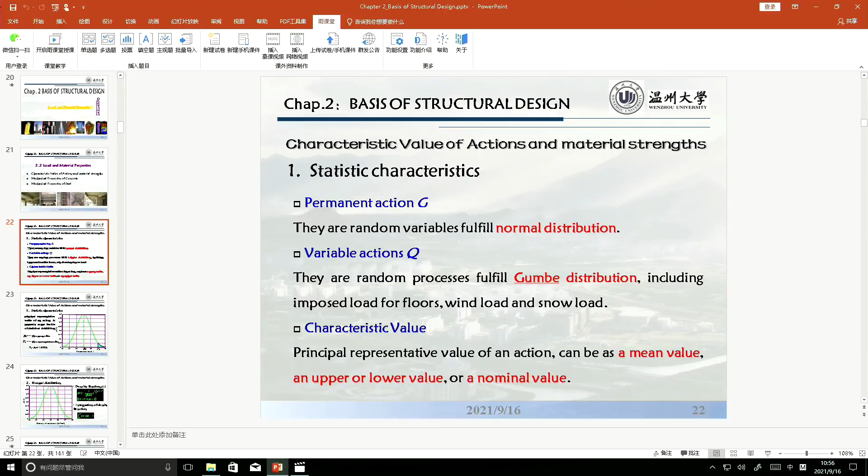And the permanent action, here, fulfills a different distribution. One is the normal distribution. Normal distribution is also named the Gaussian distribution. If you learn another class named statistics, you will systematically learn these things. Here, in my class, I just want you to know they fulfill the normal distribution.

For the normal distribution, they have some features. They are symmetric, right? Yes, symmetry. And for this distribution, they do not have symmetry. Okay, let's see this feature. This is the normal distribution figure. The shape will look like this, okay?

The density function can use this formula to describe this function. We use this function to draw the line. And how do we know the permanent load fulfills this normal distribution, actually? Because it comes from statistic analysis, right? Because people do lots of these samples, okay?

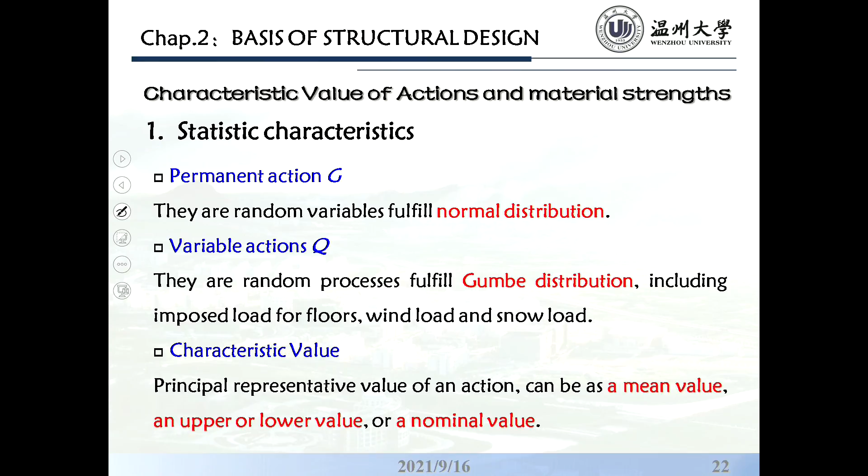Yeah, the representative value, the sigma. Because we want a value they can contain, right? The almost of the things, because here we mentioned the probability. Why we choose at here as the value, because at here these values they can contain 95% of the whole value what we measured.

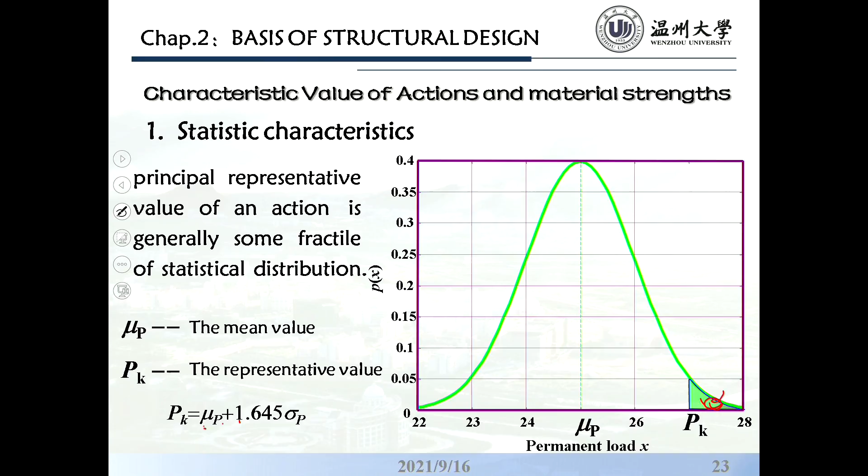Yeah, this is the normal distribution. Look at this picture I get from the code. In the future when you do the structure design, you need to read the code, and you will find the table, the code gives you tables about the different materials. Look at here, the density he lists in here. He does not give you the actual value of the density, they just give you a range.

So how to choose the value in your design process? We need to know, because the range means, since we construct, if we use this method, it's affected by the temperature, climate, and people's construction method. These things all will affect. So here he just gives you a suggested range of values that you use to do the calculation, do the hand calculation.

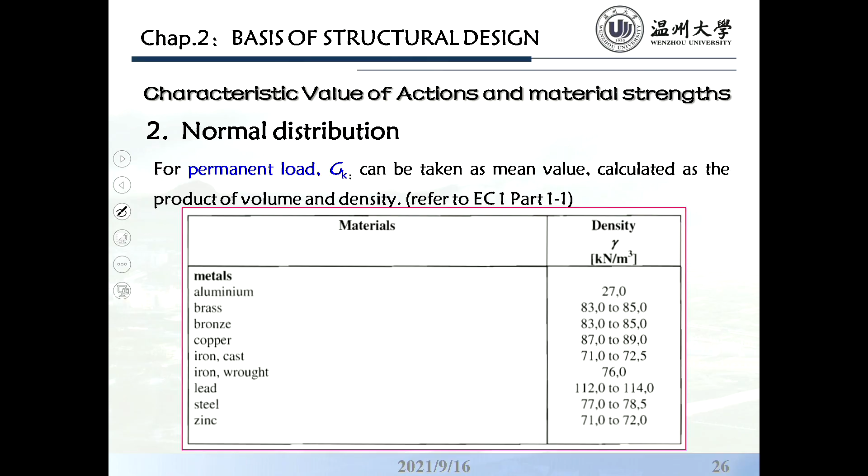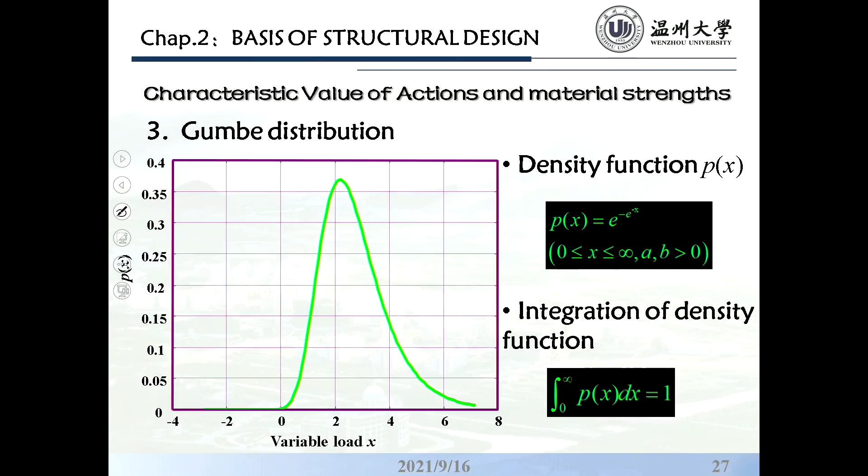For materials: aluminum, bronze, copper, iron, steel. They just give you the range because a lot of things will finally affect these values for density. This is the Gumbel distribution. They also have a different formula, but the meaning is the same, like the normal distribution.

Look at here for the imposed load. We need to classify different categories A, B, C, D. That means later we'll choose a different value. But look at here, for the load we choose from the code, they just give you the range. They do not give you the actual value. You need, according to the actual situation, to choose a value in this range in your design process.

This range, I explain why the values listed in the code, they just give a range, not the actual value, because the values of the load fulfill a distribution. They have discrete, occasional occurrence, they are not a concrete value.

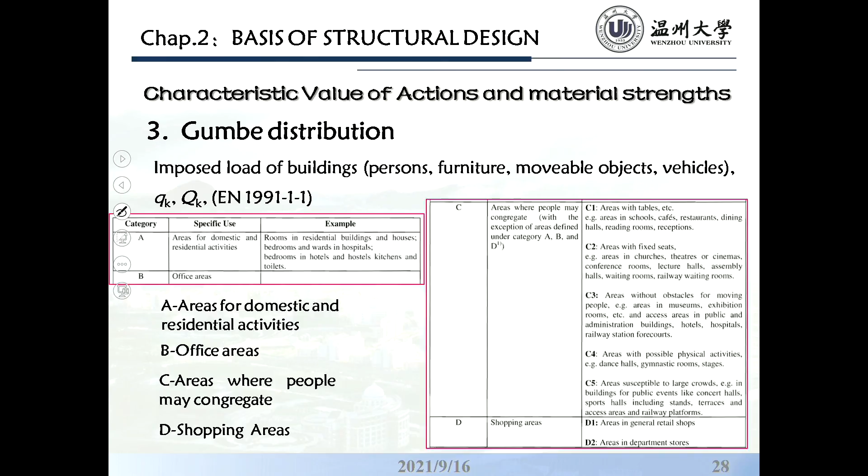This is for imposed load, the Gumbel distribution, the same like the density of the material. Here we know some statistic analysis about the permanent load. They fulfill the normal distribution, and for variable action, or just imposed action, they fulfill the Gumbel distribution.

And I just captured some table from the code. As you know, in the code, the load value chosen, they just give a range, do not give you the concrete value, right? Just the same word like concrete, 具体的, do you find that?

Well, I can see what you're writing there. The handwriting is 具体的. Wait, not handwriting, the character. 体, oh, from shenti, 身体. But here in 具体, I know the word, the English word is the same as concrete, but they have a different meaning. 具体的 is a describable word, like a concrete value or specific value. Yeah, but it's specific, the same meaning as specific.

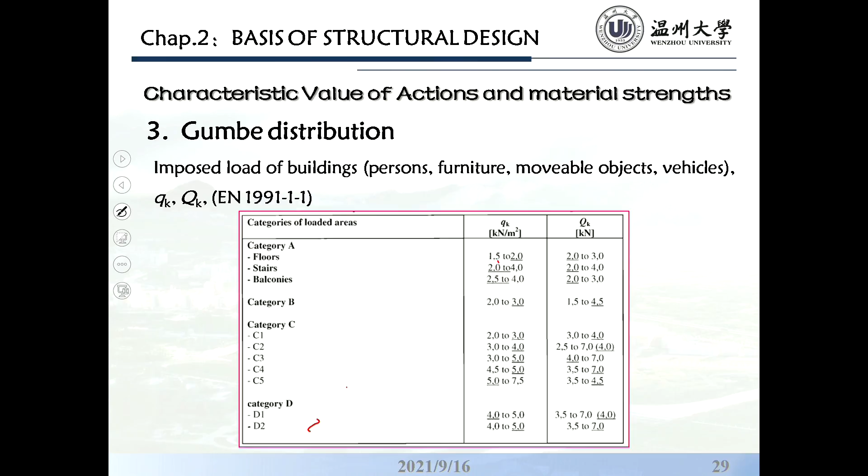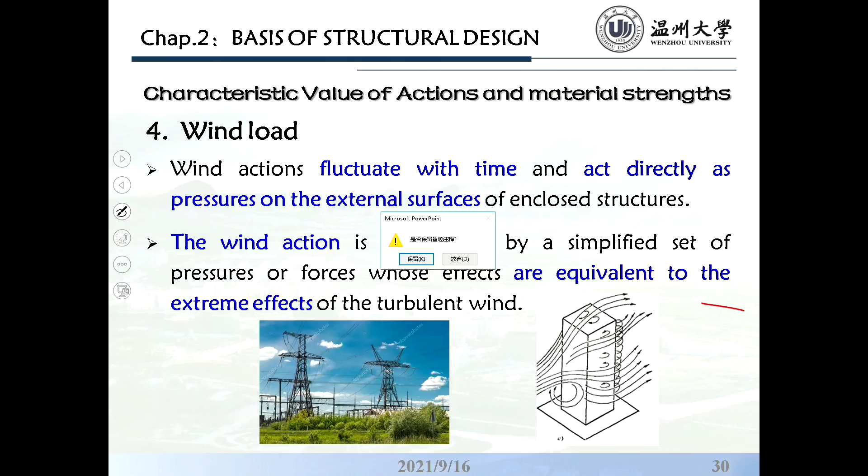Okay, here I look at this. It will relate to the tall buildings that we talked about in chapter 1, how tall a building can be.

Wind is one of the most important factors that architects and engineers must consider when designing tall buildings.

While skyscrapers might appear to be static, how does the engineer deal with the wind load? How do they use some method, some solution, during high building design? They use methods to strengthen the structures, to reduce the wind effect.

Tall buildings are in fact designed with a degree of flexibility in mind. This is principally due to the impact that wind forces, known as wind loads, have on a building as it becomes taller.

Here I introduce a character of wind load: wind load near the ground, the value is small.

With increased altitude, at the top, in the high, the wind speed will be larger. That means the wind load has this pattern.

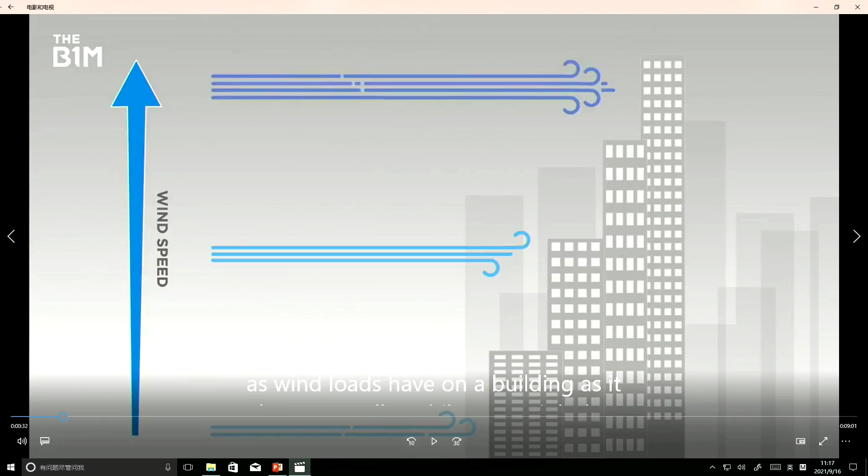Right? The load, because in the future, in the next class, you will know the wind load is related to the wind velocity. If the wind velocity is high, it means high wind load. So according to this video now, we know the wind speed is higher at height.

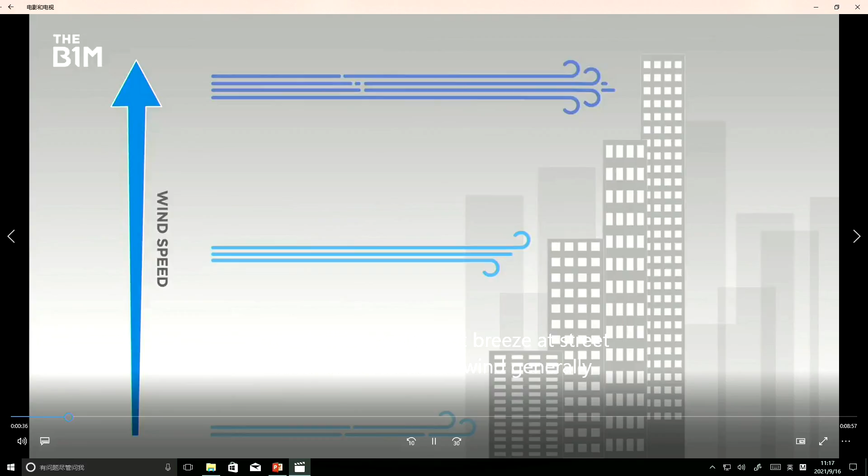Might be experiencing a pleasant breeze at street level, but the force of the wind generally grows much stronger the higher up you travel. While the steel and concrete used in a skyscraper's superstructure is designed to bend and flex to absorb the impact that these wind loads have, the degree to which a structure is able to move can have a significant impact on the comfort of those inside the building.

When buildings first began to grow tall in the 1890s and 1900s, height limits were imposed, such as those introduced in Chicago, to prevent their masses from blocking sunlight. In New York City, ordinances were passed that allowed tall buildings to develop on the basis that they were set back after reaching a certain height. This allowed sunlight to reach street level, whilst breaking up the facade and reducing the impact that high winds had on these early towers. By the 1960s, however, larger box-like skyscrapers began to come to prevalence, bringing with them a whole host of wind-load engineering challenges. The first problem that began...

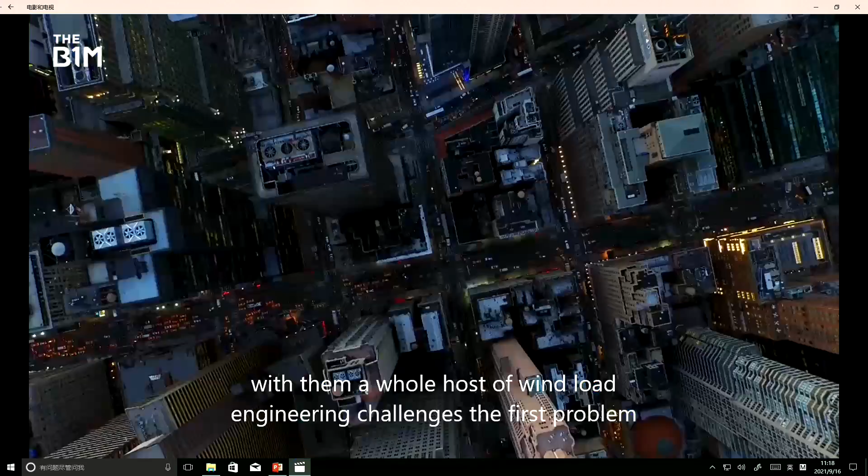Here, I think you realize why people build high buildings, because in New York, they built a lot of skyscrapers to prevent blocking sunlight. So one building blocks sunlight, so another building is built higher for sunlight. So the height of the building becomes higher. That caused the high buildings, the skyscrapers, to come about. So this is the background of why high buildings occur in our life, because it's just for sunlight, like a plant. If the plant is higher, it can get the full sunlight. So that's the background.

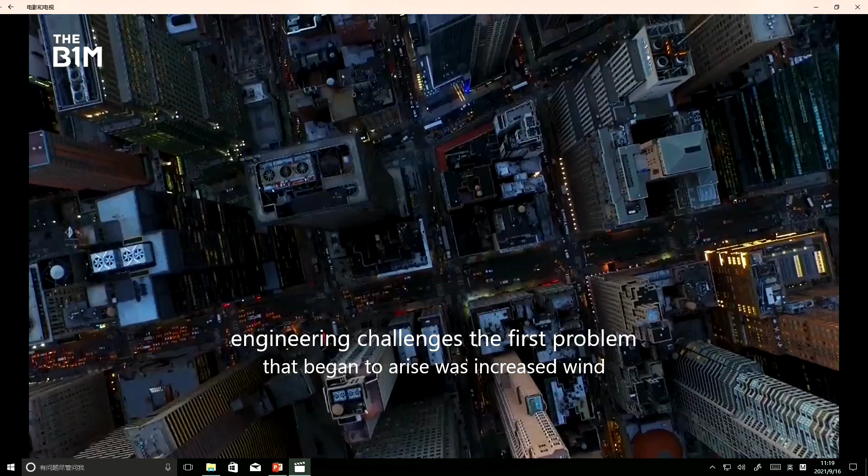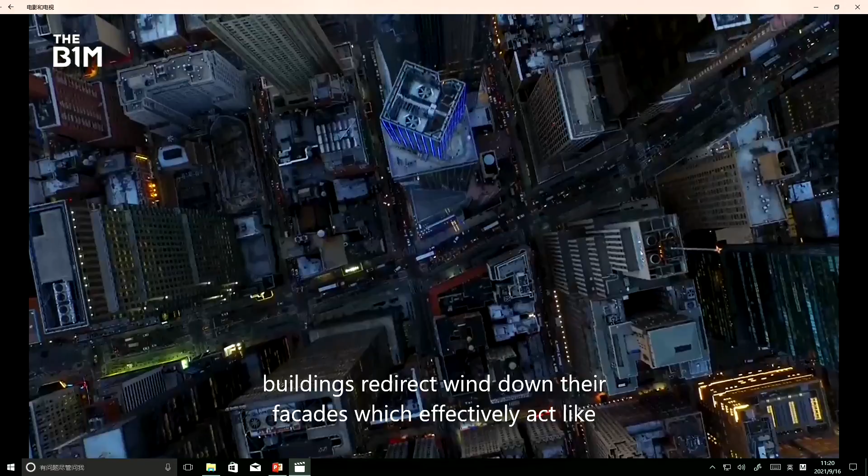And to arise was increased wind velocity at street level. This was principally caused by the street canyon phenomenon, an effect that sees large buildings redirect wind down their facades, which effectively act like canyon walls, and funnel it along streets at much higher velocities than in low-rise suburban areas.

Here they talk about a phenomenon called the street canyon. I will explain, because in order to build high buildings, people faced a lot of challenges. One thing you will see in the city is that if a high building is built like this, in the middle part, the wind load and wind speed will feel really high. This is a phenomenon called the street canyon phenomenon.

I'm not sure, did you see in the river? This is the bridge, and this is the pier to support the bridge. This is the river. You will see when the water comes in here, the water's velocity is really fast.

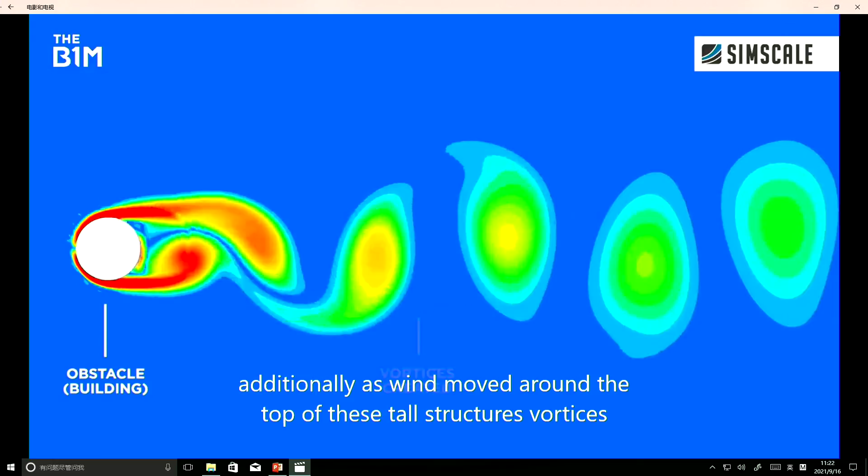Another phenomenon is the vortices. For example, with buildings like this, wind comes behind the building and vortices occur. There are two phenomena you need to know: one is the street canyon phenomenon, and one is the vortices.

How to say this - this is the building. If you stand here, you will feel cool, a low temperature, because the wind is really strong near here. But this phenomenon - if there's only one building and you stand here, you can't feel the wind strong.

But if there are two high buildings, and you stand anywhere - if you can stand here, it's also okay - you can feel really strong wind come. Oh, really cool, like that. But if there's only one building, and you stand here, you can't feel that phenomenon.

This is for constructing high buildings. There's a phenomenon that occurs in Manhattan, because in Manhattan there are lots of tall buildings, and people are at the top. So the wind in this place is really strong.

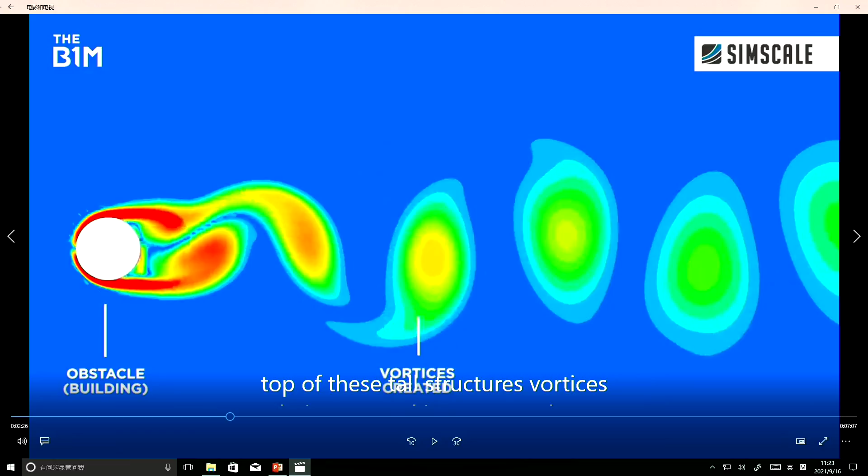And another phenomenon is the vortices. Vortices occur in a process known as vortex shedding. This process, much like water flowing downstream, acts differently on obstacles depending on how streamlined they are.

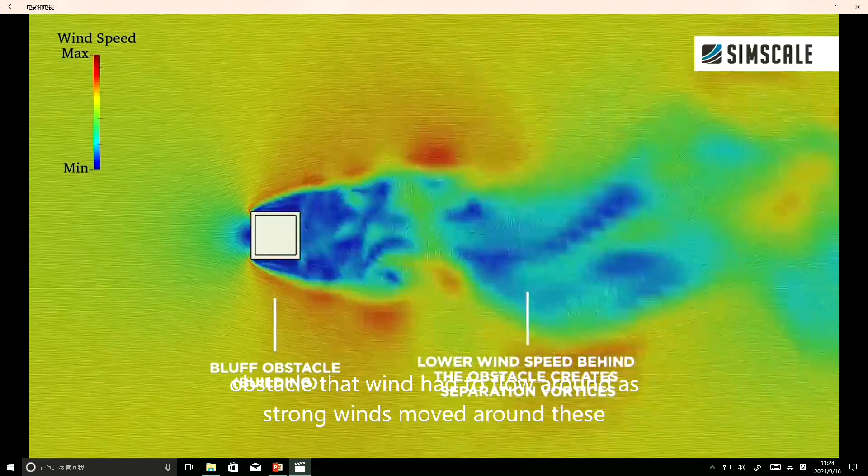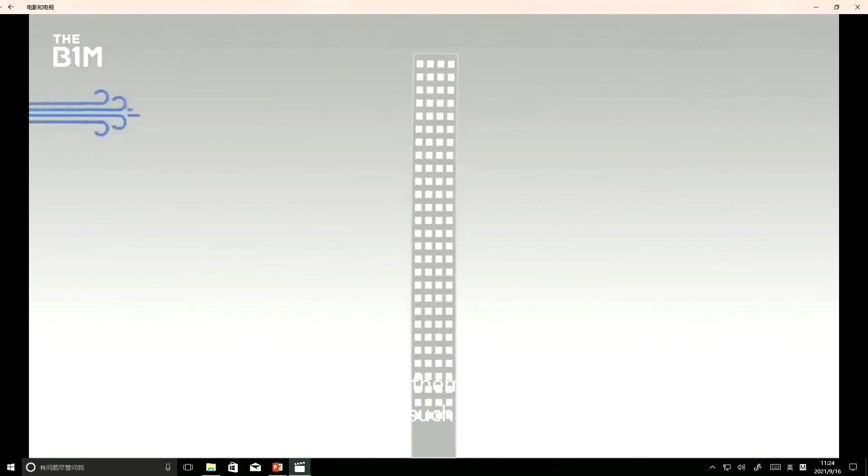In the case of these buildings, their sheer block walls created a bluff obstacle that wind had to flow around. As strong winds moved around these structures, areas of low pressure emerged on the opposite side, creating suction forces that pulled at the buildings, causing them to sway back and forth. While any such movement may initially be minimal, high winds can create vortices that match the frequency of the building, causing noticeable swaying and shaking motions for those inside.

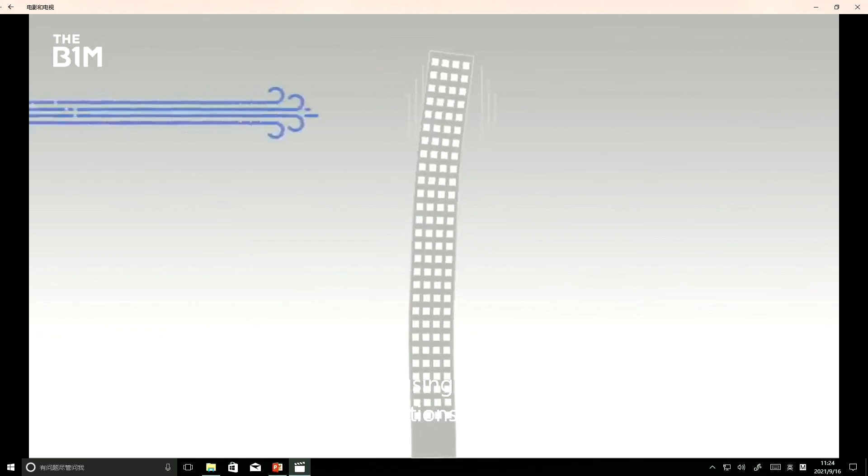This phenomenon led engineers to begin testing models of tall buildings in wind tunnels at the design stage, assessing the potential impact of high winds on structures before they were constructed. By doing this, project teams were able to develop innovative approaches to managing wind loads, reducing their impact on tall buildings and enabling them to rise even higher.

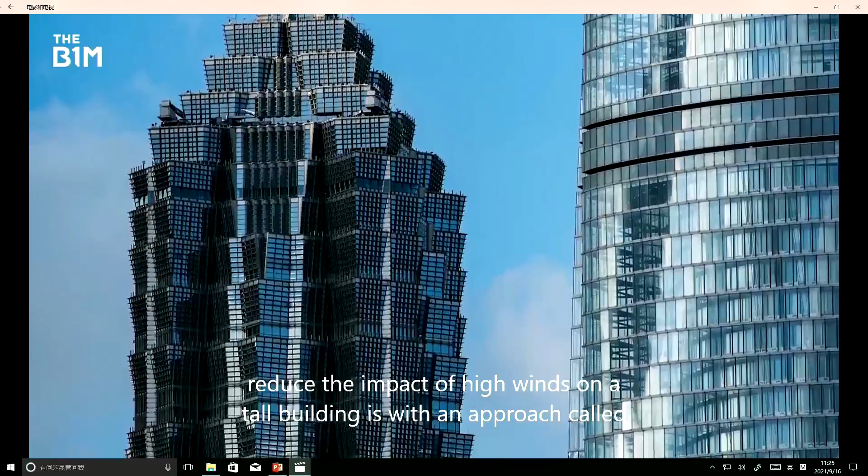If you stand here, you feel strong wind. The first and by far simplest way to reduce the impact of high winds on a tall building is an approach called corner softening. Corner softening sees sharp edges smoothed off of a structure.

Here, because now people provide some solutions to reduce the wind load. Before, when people built tall buildings, they wanted to know the behavior of the tall buildings under wind load. They would carry out wind tunnel experiments, building small models, and in the wind tunnel that wind comes to test. They do the experiment, and then they summarize the principle.

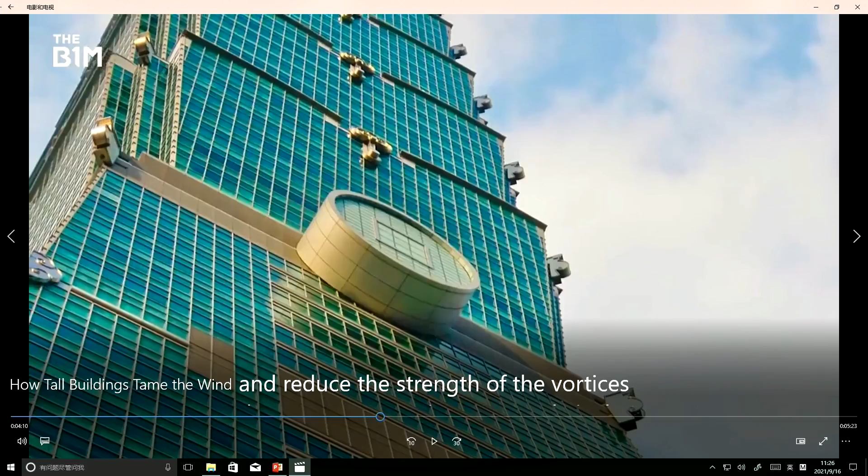And they found they can make it more aerodynamic, or create small cutouts on the edges of the structure to scramble prevailing winds and reduce the strength of the vortices they create. A prominent example - we change the section, the cross section of the building. They can reduce the wind load.

Remember corner softening in your structure design. When one day in the future you design tall buildings, you can choose this method to change the corner. It can reduce the wind load. And there is a Taipei 101 of this building.

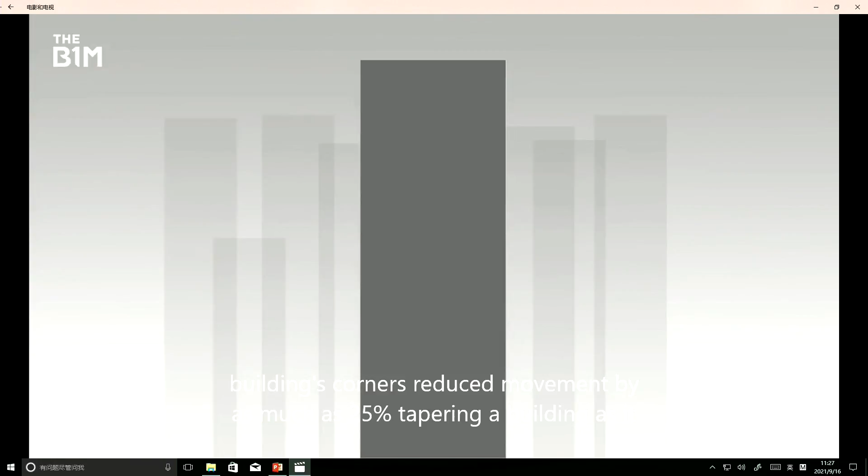They use this method to reduce the wind load. An example is the ornamental design of Taiwan's Taipei 101, where relatively minor cutouts on the building's corners reduced movement by as much as 25%. Tapering a building as it rises also breaks up the uniformity that causes vortex shedding.

Kuala Lumpur's Petronas Towers and the Shard in London both use this technique to reduce the effect that high winds have on their structures. Taking things a step further, alternating a building's profile as it rises, and including setbacks, can also reduce the strength of vortices as they move around buildings.

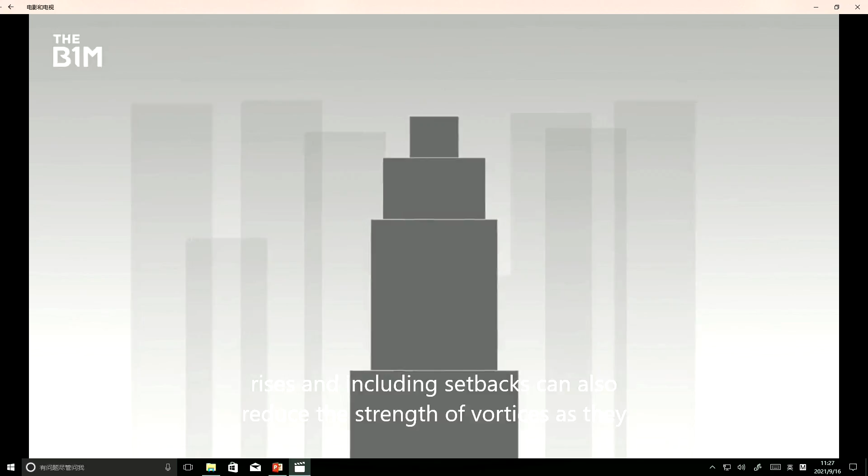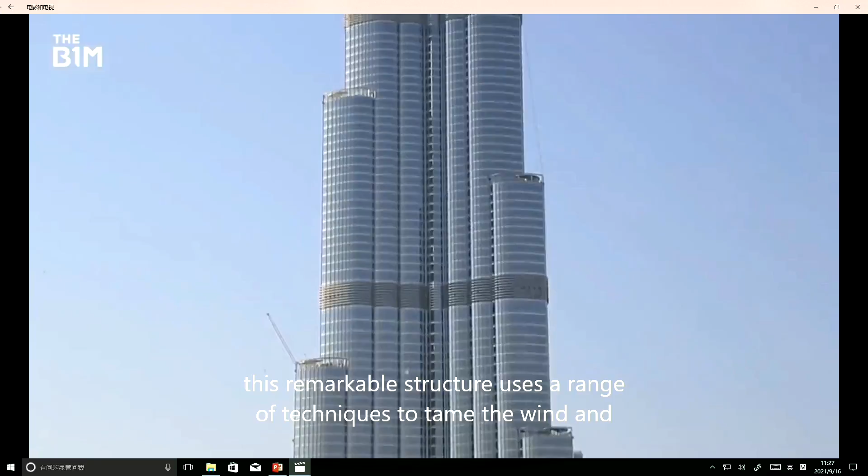Some of New York City's early skyscrapers achieved this in response to the setback ordinances of 1916. But perhaps the most notable example today is the 828-metre Burj Khalifa in the United Arab Emirates, the world's tallest building at the time of filming. This remarkable structure uses a range of techniques to tame the wind and achieve its height, including an extreme taper, multiple setbacks, and a high degree of corner softening.

We've demonstrated how the Burj Khalifa's carefully crafted design manages the wind in this simulation.

Before I show this, I want to ask: do we use computer calculation or hand calculation? Nowadays, for these buildings, it's really complicated — if we just use hand calculation, it's not feasible to do this calculation. So we use the computer to do the calculation. Here, I recommend you a software.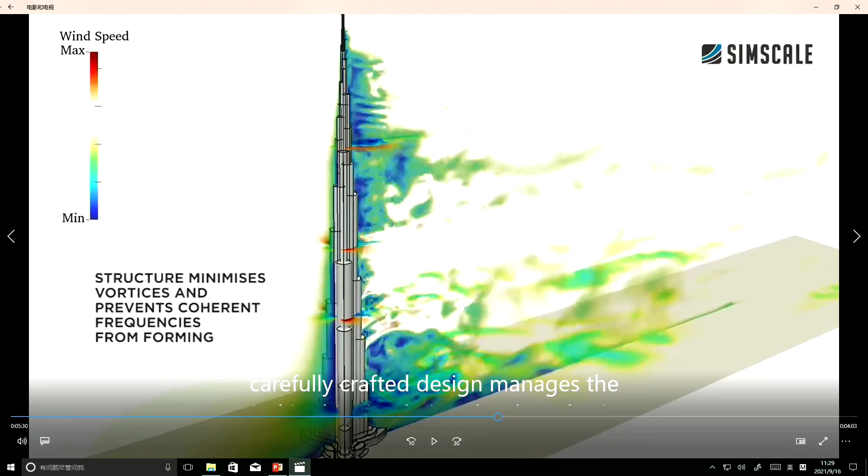If you're just curious about wind calculation — this software is developed using SimScale.

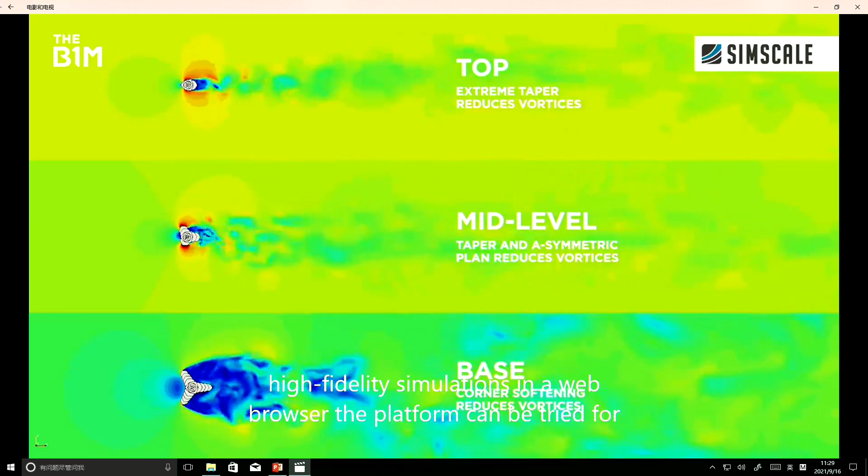With more than 150,000 users worldwide, SimScale is an easy-to-use, cloud-based engineering simulation platform that enables everyone to create powerful, high-fidelity simulations in a web browser. The platform can be tried for free through the community account, which gives access to thousands of public simulations to promote knowledge sharing and to crowdsource advice.

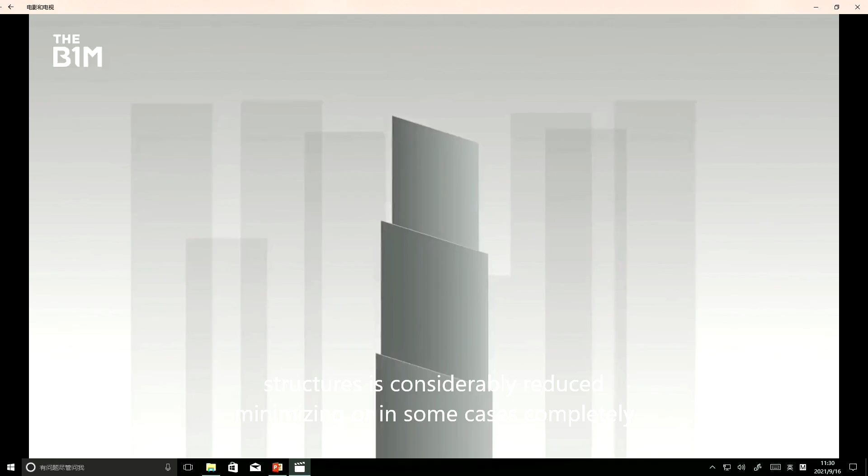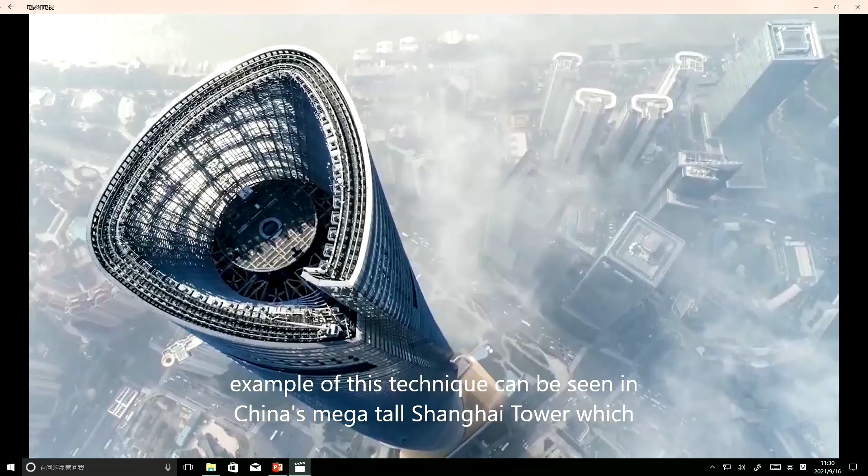Creating a twist in a building's form can also reduce the impact of vortex shedding. With every floor offset from the last, the number of bluff areas across these structures is considerably reduced, minimizing or in some cases completely eliminating the locations where vortices can form. Perhaps the most breathtaking example of this technique can be seen in China's megatall Shanghai Tower, which tames the wind and rises to become the world's second tallest building by elegantly twisting throughout its height.

Look at this building I mentioned in chapter 1 — the appearance is designed like a twist. That's good for reducing wind load. Because of this method, when wind comes, it causes the tall building to twist, but it has anti-wind, anti-twist resistance — good resistance. So if they use this method, it also allows us to construct taller buildings in the design. It's 632 meters in height.

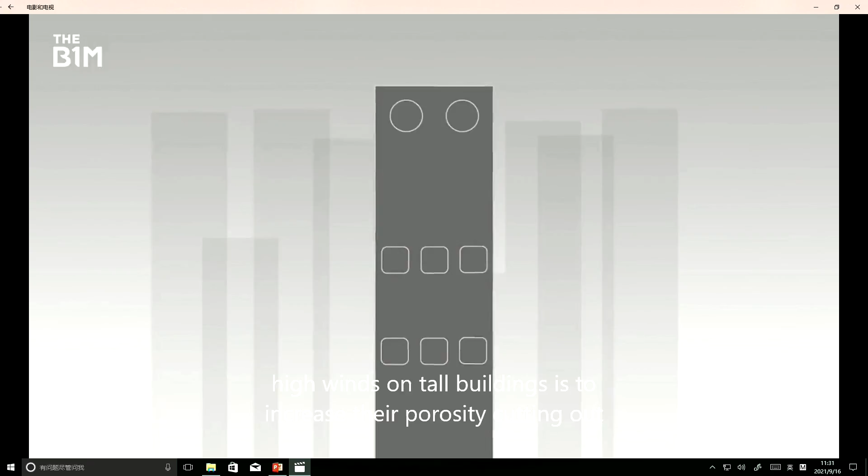Another way to reduce the impact of high winds on tall buildings is to increase their porosity, cutting out parts of the structure and allowing air to flow through as well as around the building mass. This technique has been used in a number of high-profile skyscrapers around the world, including Saudi Arabia's Kingdom Center and the World Financial Center in Shanghai, China.

But the most impressive example can be seen in New York City's 432 Park Avenue. With an incredible width-to-height ratio of 1:15, the tower is one of the world's most slender skyscrapers and the most prominent manifestation of New York's emerging super skinny residential tower trend to date. The 426-meter tower features double-floor cutouts at 12-story intervals throughout its height, allowing wind to pass through as well as around its extremely thin structure.

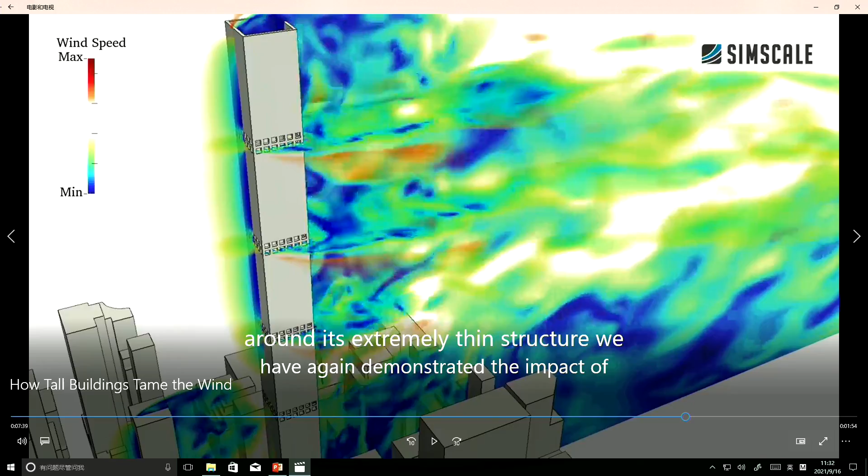They again use this software to do the analysis. They find that for tall buildings, if you add some holes in the buildings, letting wind pass through, it also can reduce the wind load. These things — just like us, civil engineers — they do the research, they do the experiment, they develop the theory, and the more things we realize, the taller buildings we can build.